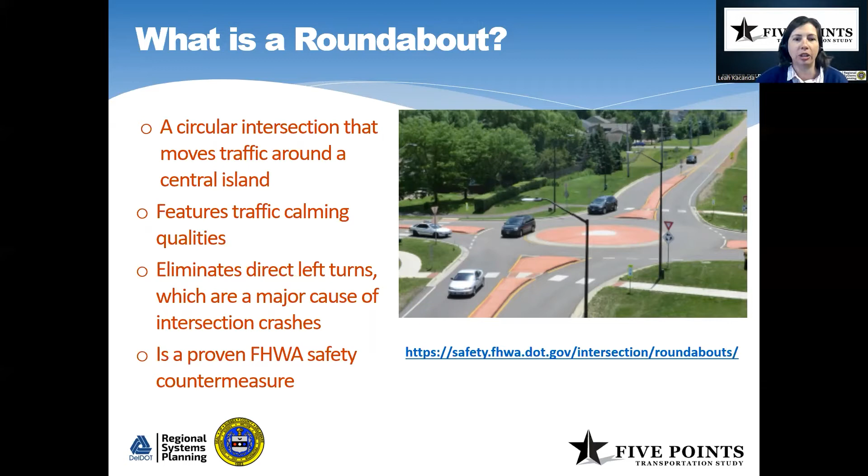In your meeting packets, you should be able to directly click on that link and any other links you see in the presentation to learn more. Just keep that in mind.

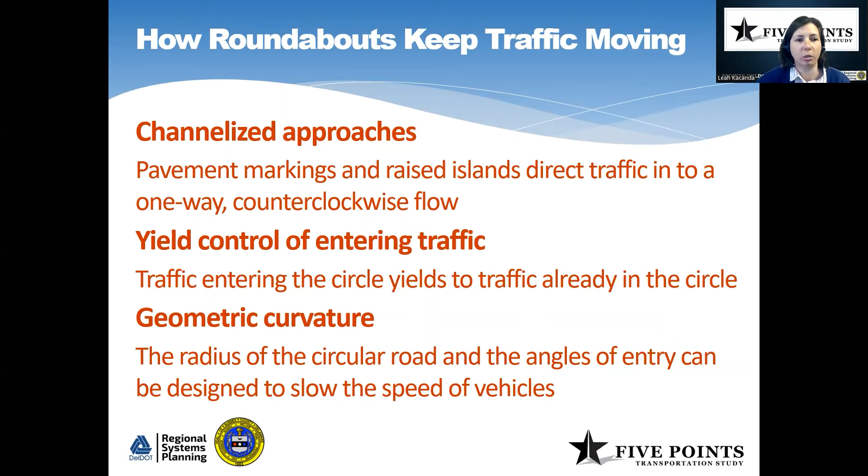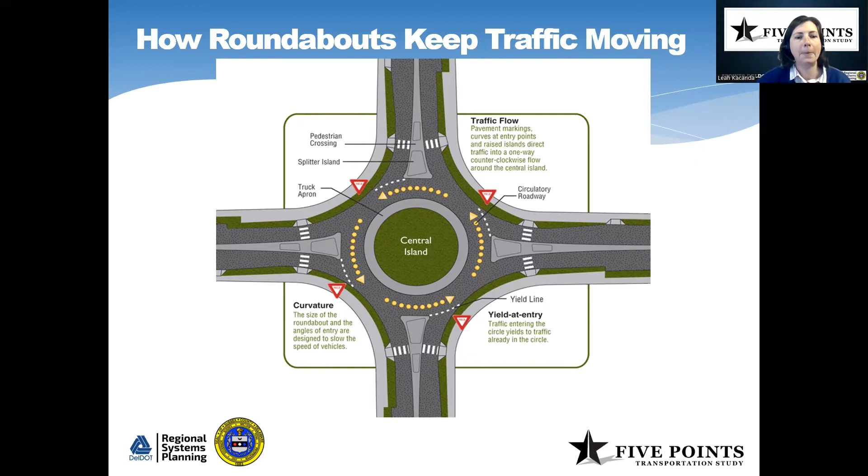So what is the difference between a modern roundabout and an older traffic circle? They're actually pretty significantly different. An older style traffic circle is much larger. If you think about downtown Georgetown, that's an older traffic rotary. It's a very big space.

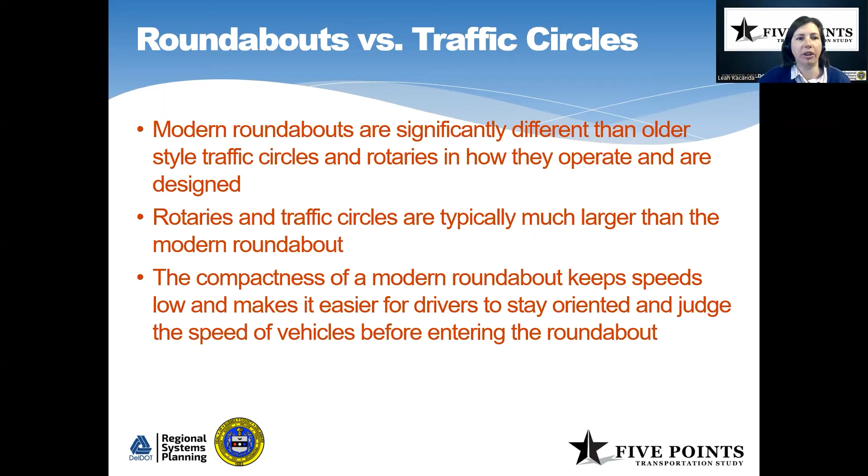And that doesn't have some of the same benefits we've just been talking about. It doesn't keep speeds as low because it's much bigger, and it's also harder for cars to see people entering and leaving and keep track of things. So the new modern roundabout is substantially better, and some of those differences are shown here on screen.

Leah, Kim has a question. Kim? Yes, actually, I probably raised my hand too soon. You might be about to answer that question.

I was just curious why there weren't more merge lanes on the circles, so that if somebody's pulling off, you have time to pull in. But you were just saying you don't want people weaving in the circle.

Does anyone else from the project team want to speak to that a little bit more eloquently than I just did? I was just curious about one.

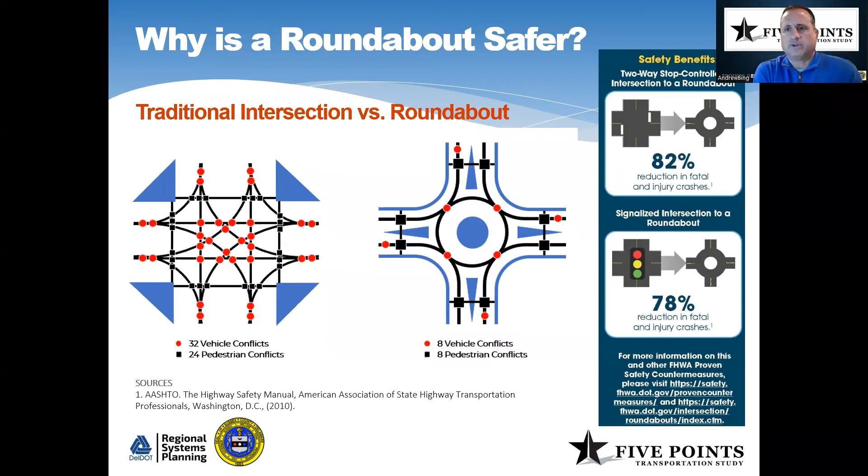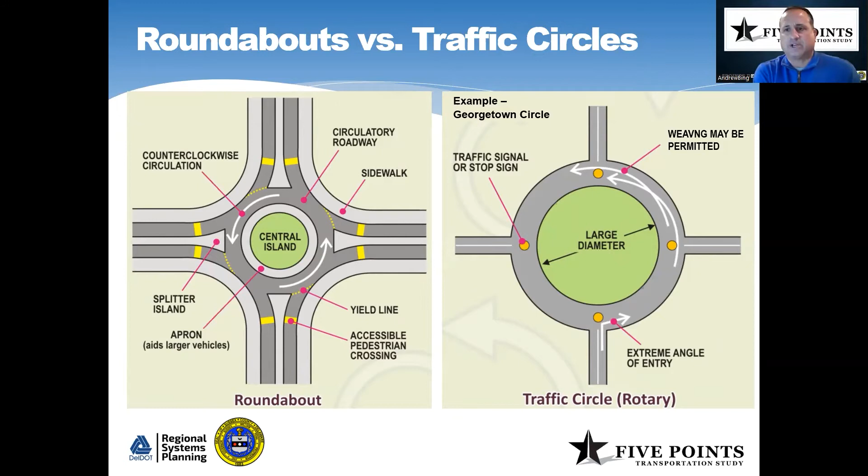I appreciate the positive responses to the first few slides. Why don't we hold off on questions again, unless there's a point that someone doesn't understand, and then let's come back at the end of Leah's presentation and have a discussion where everyone can chime in. Go ahead, Leah. Thank you, Andrew.

In further support of folks who get confused or otherwise when using a roundabout, DelDOT does have some very great and useful guidance on the website right now for how to use a roundabout for all modes. So we'll start with cars, which is pretty straightforward, and it seems like most of you are pretty familiar with this.

But again, for those of your neighbors who may not be as comfortable: slow down when you're approaching the roundabout, stay to the right, keep an eye out for people walking and biking, make sure you yield if there's already traffic moving around the circle. Once you're in the roundabout, don't stop unless you're avoiding a collision. Continue traveling in that counterclockwise direction. Do not pass—there shouldn't be room in the roundabout to pass, so that shouldn't be too big of an issue. Just continue following the roundabout until you exit.

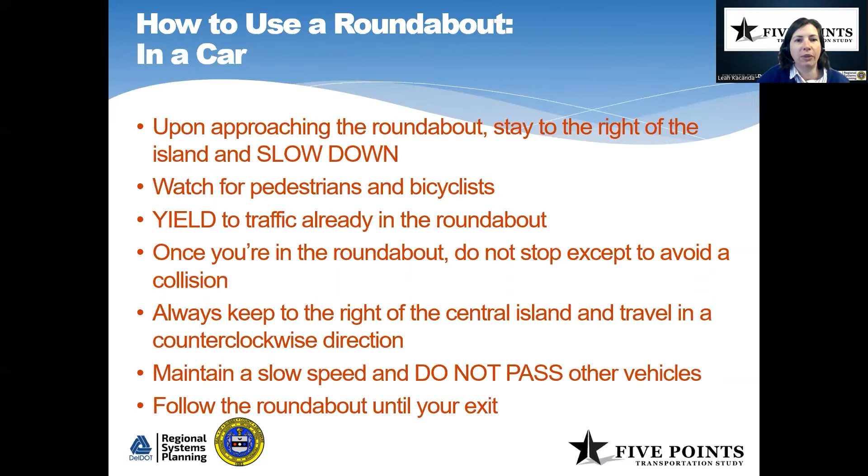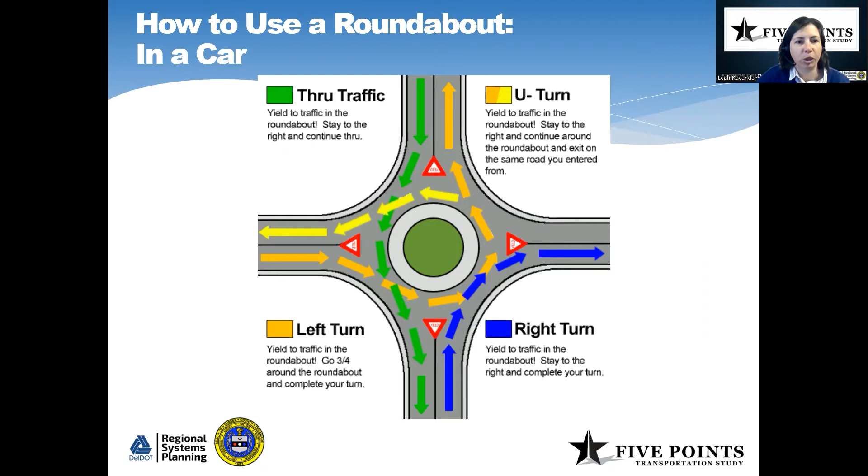I think one thing we can all agree on is that some of us learn better looking at these diagrams, and some of us like the written-out version. So we'll make an effort to include both forms in future communications, both with the public and others.

We want to reiterate: part of the reason roundabouts are better for cars is also a reason they're good for people walking and biking, because that slower speed means non-motorized users are much safer since cars are more likely to yield. They don't have to stop as quickly or as severely because they're already traveling slower. When they do have to stop, their stopping distance is shorter and the risk of collision is lower. And if there is a collision, there's much less chance it will be severe because speeds are lower.

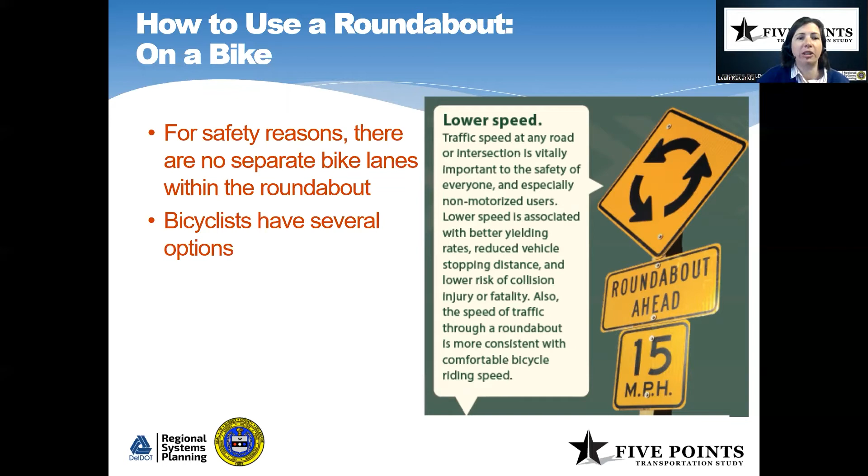So a bike has three options. As you see in the upper right, they can ride like a car with traffic—an option, as I'm sure Mike Tyler knows, for the more serious, avid cyclist who's comfortable riding and sharing the lane. They can join the lane and travel around, and because speeds are pretty slow, that's comfortable. Now, if cyclists are a little less comfortable, they can dismount their bike and travel through the roundabout like a pedestrian, using sidewalks and crosswalks.

Alternately, especially in the beach area, there may be a shared use path available, and in that instance the bike would behave much the same as a pedestrian because that pathway would also use crosswalks. On this slide we have a diagram showing those different behaviors—in the lower right, in red, you can see that bike behavior.

So one bike there is kind of joining the road with traffic and the other one is using the sidewalk to move through. And then for pedestrians, you see in that blue figure in the blue line, just using a crosswalk, sidewalk to crosswalk again to travel through that intersection. One thing to remember, if you're walking or biking, is never cross into the center island. You can imagine how it's pretty easy for someone to just get stuck in there without an easy or safe way out.

Also, for people using those crosswalks, it's important to look towards approaching traffic when entering the roundabout and then departing traffic when crossing the exit lanes. One benefit of roundabouts also is the splitter islands that help divert motor vehicles also can provide a pedestrian refuge. So that's a little bit of extra space to catch your breath and look the other direction when crossing.

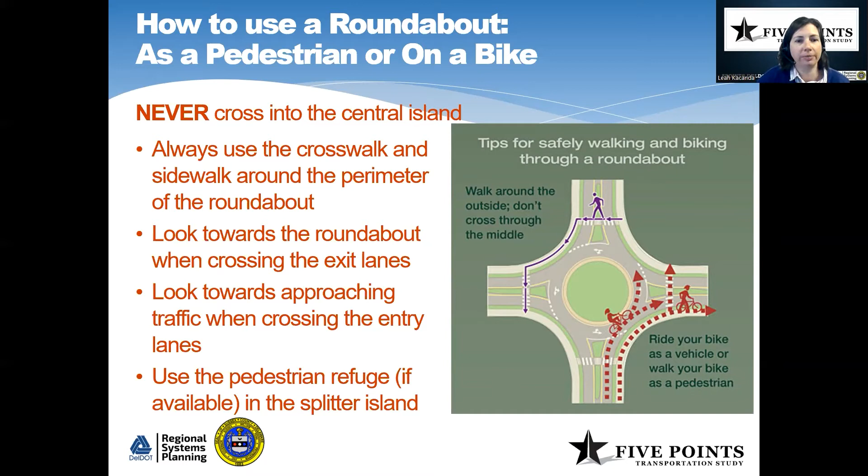Pedestrians, as always, whether they're crossing near a roundabout or just at a normal mid-block crossing or other signalized intersection, should only cross when it's safe. Make sure that drivers can see you when you're crossing or wait for that adequate gap in traffic. And on the bottom there, you can see, and this kind of speaks to what was raised earlier, when there is a multi-lane roundabout, that is a little bit trickier for pedestrians. People crossing have to make sure that both lanes of traffic are clear before they make that crossing movement.

So, as Andrew alluded to earlier, and I'm sure many of you know, given all of your— I'm sorry to interrupt, but I will forget it if I don't ask. On those crosswalks, this is Bob. If somebody's in the crosswalk, obviously they'd have the right of way, but technically, as soon as a pedestrian's in the crosswalk, that means that traffic's going to have to stop. Does that still apply on these? Yeah, it's the same rule for crosswalks that apply to any crosswalk in the state. You know, pedestrian has the right of way. Okay, thank you.

Keep going, Leah. Okay, I saw you come on, Andrew. I was waiting for you to say something. Nope, I was just checking in with Bob. Right. Very good.

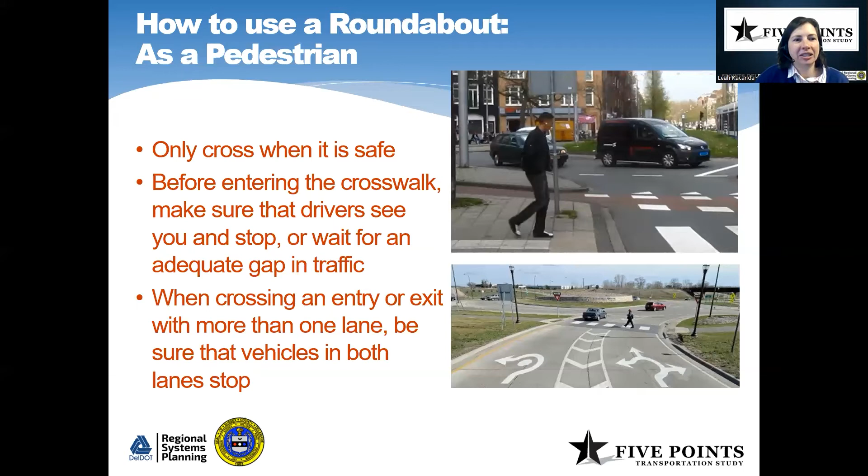So, more roundabouts are coming. So we know Beaver Dam Road came in October this past year, and I'm sure that has spawned a lot of the dialogue you've all been seeing on social media and maybe with your neighbors in person. But we also have a couple of other projects coming online soon that will have roundabouts, including Plantation Road, Wescoats Road at Marsh Road, and Minos Conaway has 3 roundabouts actually at the locations indicated on the screen. So more to come

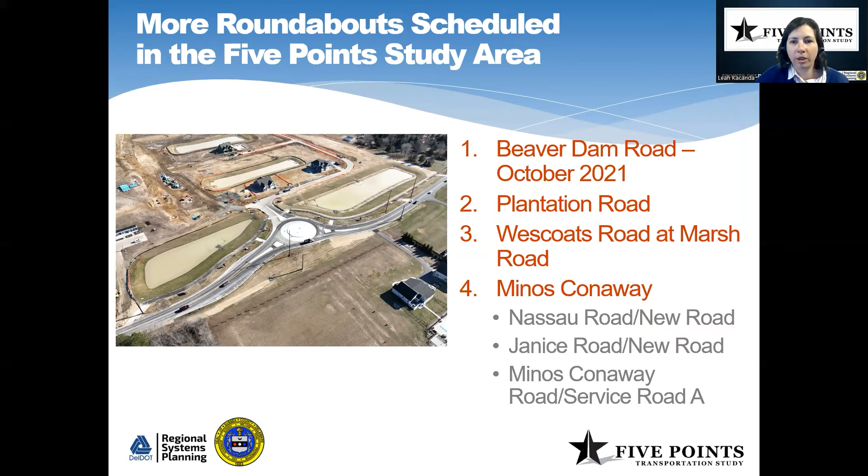with those. And for all the reasons we already discussed today, for the safety reasons, because of the improved traffic flow, roundabouts are the preferred intersection improvement considered across the country, not just in Delaware. And it's because they are safer. They're safer than traffic signals and stop signs. And in addition to that safety benefit, they also improve that traffic flow and are better for the environment.

That being said, as Todd said earlier, they are considered on a case-by-case basis. So this isn't just intersections changing, we're putting a roundabout there. It does depend on that analysis of current traffic volumes and flows, as well as how much right-of-way is available, the environmental impact, and drainage and utility impacts.

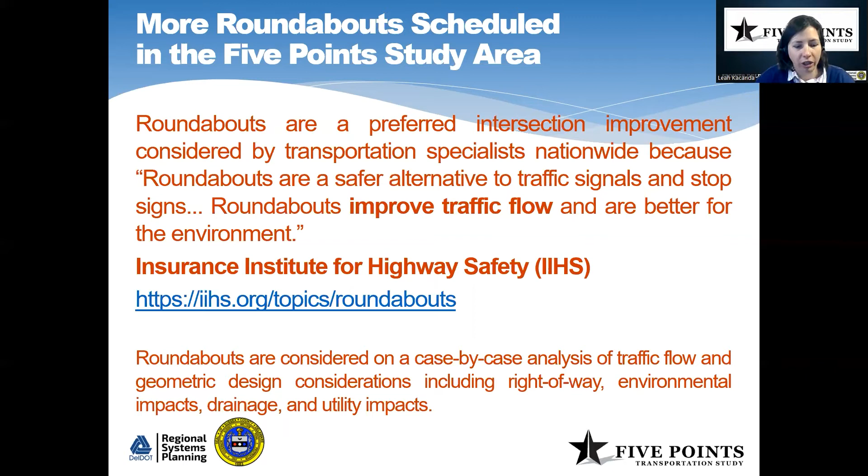More information on roundabouts is available on the DelDOT website. As Bob, I think you mentioned earlier, you were directing some of your neighbors to that site, there's a roundabout location map that's interactive, as well as more information about how to use roundabouts for different modes of travel. Thank you. Andrew?

Great, Leah, thank you. That was great. And we'll now open it up to working group questions and comments. Again, just raise your hand. Hopefully, Mike Tyler, we've got your audio now. But before we do that, I was going to have Shantae come on just to respond to a point we got through the Q&A. Just seemed like a worthwhile time for her to come on and say a quick hi and respond to that question.

So, hi, everyone. Shantae Hastings, Deputy Secretary for DelDOT. So the question that we received in the Q&A is, why is the new roundabout at New Road and Janice Road have a posted speed limit of 15 miles per hour? It is not needed. And also the private roundabout in Village of 5 Points has stop signs up. That defeats the purpose.

So in terms of the 15 miles per hour at the new roundabout, the 15 miles per hour is likely an advisory speed limit. So those are the yellow placards with black text. So that's not regulatory, like a speed limit sign. That's a white placard with black text. So it's just an advisory speed.

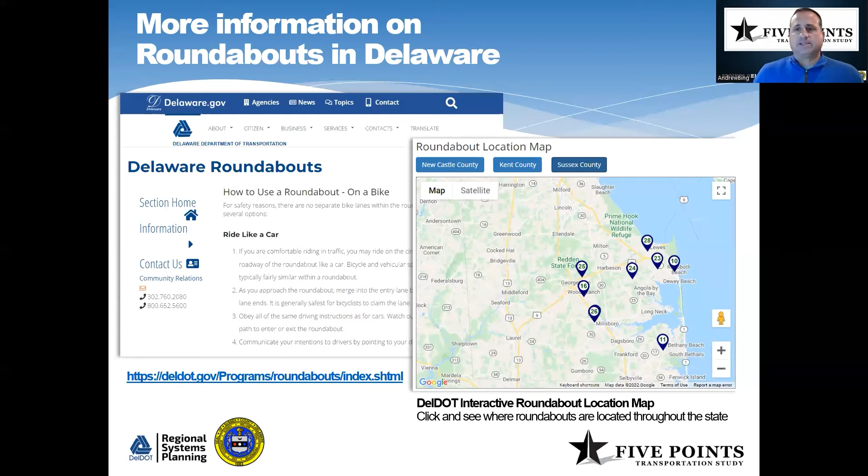Okay, we're going to move on. I don't see any other hands raised, but again, one of the roles that this working group plays is to not only attend meetings, not only engage in discussion and ask questions, but to share this information, to make people aware of it. You certainly don't have to provide the presentation, but it's the kind of thing that if you're out there talking to someone, you can point them to this presentation on the website, let people know about it.

Speaker Schwarzkopf, in terms of your point of publicizing it, some of the images are certainly something that we can discuss and look into. So what we're going to do now is shift to our next discussion, which is trees within the right-of-way. I'm looking off on my other screen here while I read something, but this is a slightly different presentation in that it is in response to one of our recommendations from phase one, recommendation B14, which was a recommendation to identify locations where trees can safely be planted within the right-of-way.

So this was a recommendation that was, I guess I misspoke, this was initiated in 2021. DelDOT's going to need working group input to move this recommendation forward. So it doesn't all have to come tonight, but we are looking for that input.

Mike Campbell is going to provide this presentation tonight and going to provide background to the working group on guidelines that need to apply to trees in the right-of-way. So that's kind of the purpose of this presentation, is both to inform, educate, but also engage in a discussion with the working group and get some feedback and input. So I'm going to bring Mike Campbell on, who's going to lead us through that presentation.

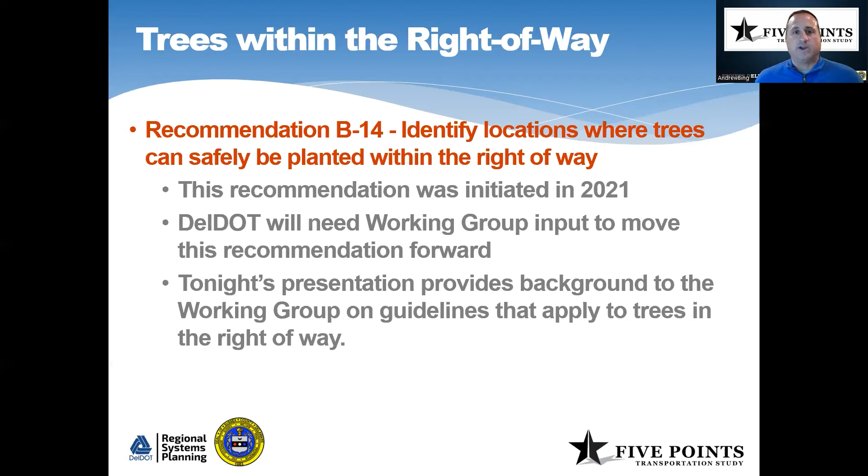Thank you, Andrew. Good evening, everyone. Tonight, I'm happy to provide a brief overview of the process and framework of when trees and landscape is provided within the public right-of-way. First, I'll walk you through when landscaping is placed within the right-of-way. Then we'll talk a little bit about where landscaping is usually permitted within the right-of-way, the types of landscape that are permitted, and lastly, who's responsible for maintenance.

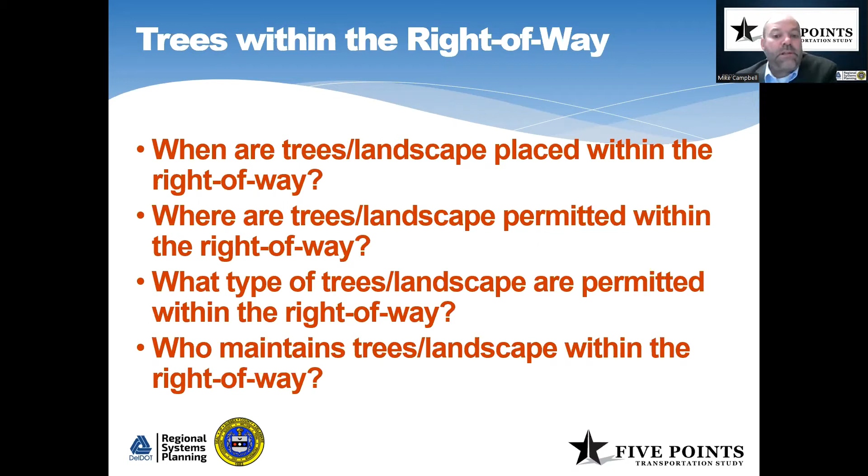So there are two main reasons DelDOT would include plantings on a typical project within the public right-of-way. The first is when it's required by law. The Landscaping and Reforestation Act requires that DelDOT provide reforestation for impacts to existing forests. The quantity and placement of reforestation is usually dictated by the threshold of impacts. The second reason DelDOT may consider including landscaping is when the community requests it. They may request landscaping for aesthetic purposes, or possibly for visual screening, or to reduce noise pollution from an adjacent roadway.

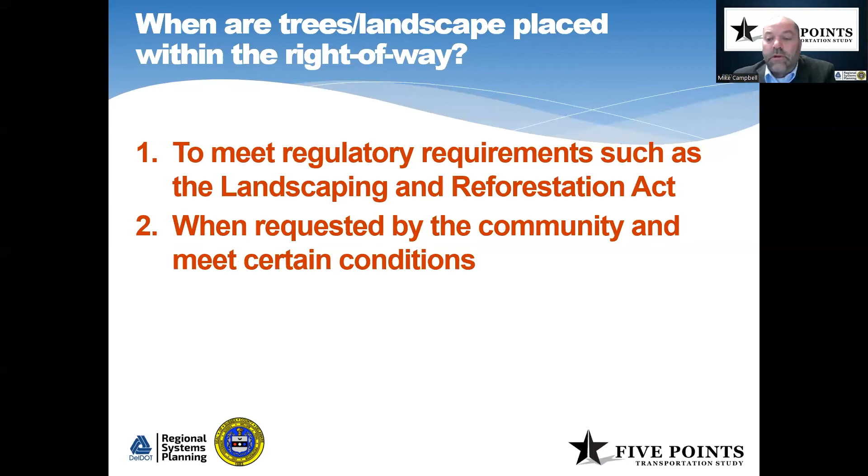The requirements or desire for landscaping starts early in the planning process. As a project goes through the planning process, we consider mitigation of forest impacts, and the desire for plantings may be brought about during the public engagement process, similar to what we are doing here with the 5 Points planning process. Internally, DelDOT planning will coordinate with the local DelDOT maintenance district and concurrently with DelDOT's roadside environmental coordinator to discuss the project and any potential maintenance concerns related to the landscape.

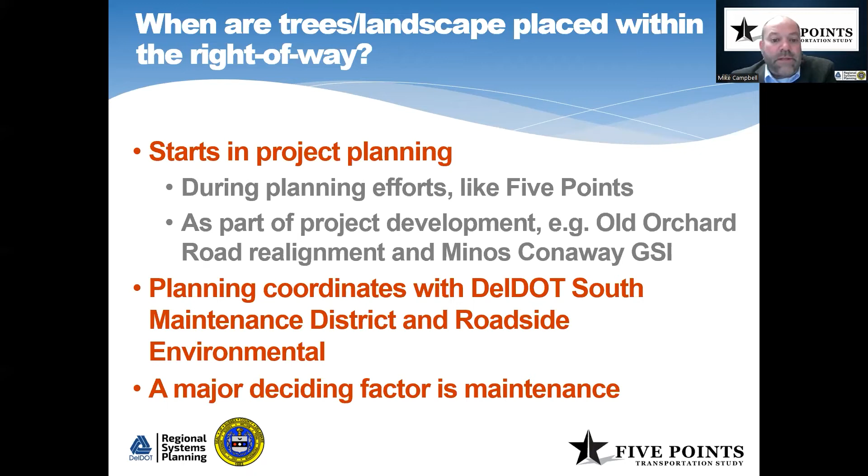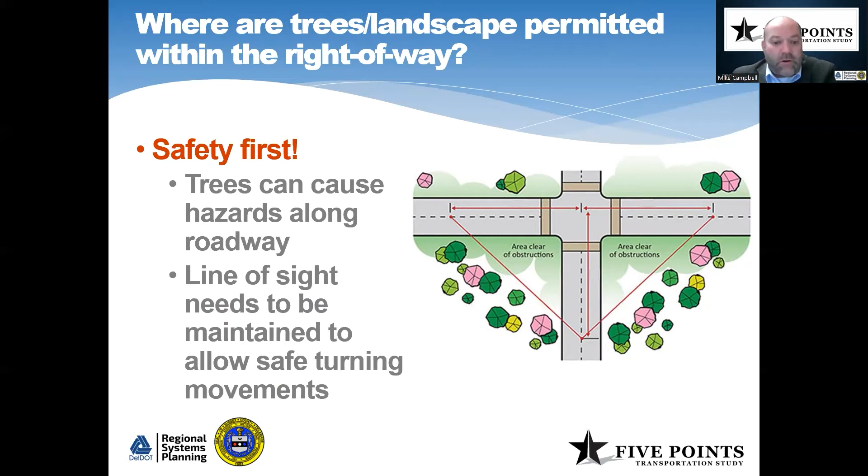So now that you've planned for landscape in the right-of-way, we'll talk a little bit about where landscaping can be placed. Safety is a major factor. Trees are obviously fixed objects and must be carefully placed to not cause a potential hazard. Trees must be set back at intersections to maintain lines of sight to allow for safe movement for pedestrians, cars, and bicyclists. Lateral offsets are also critical components to the design. The roadway classification, design speeds, and presence of a physical barrier will dictate required offsets for safety. Adjacent land use is also a factor, whereas street trees or aesthetic stormwater plantings behind the curb may be more appropriate in an urban setting or more desired by the public as well.

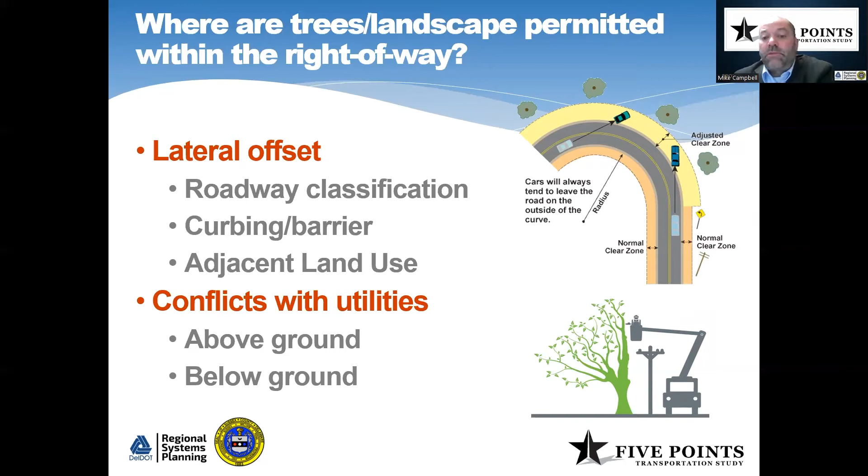Trees and utilities are often competing for limited available space within the right-of-way, both above ground and below ground. We want to make sure that we use the right species that are selected for the project, and that'll reduce future maintenance impacts for both the trees as well as the utility companies. As I mentioned, proper species selection is also critical for the success of the landscape. Things like tolerance to salt spray and wind and sandy soil are some of the environmental aspects to consider, especially specific to Sussex County. Obviously, the department does not want to promote any harmful species, such as an invasive species. And there's currently a draft bill that may require all plantings within the public way to be native species. So we'll provide an update on that as that bill gets developed further.

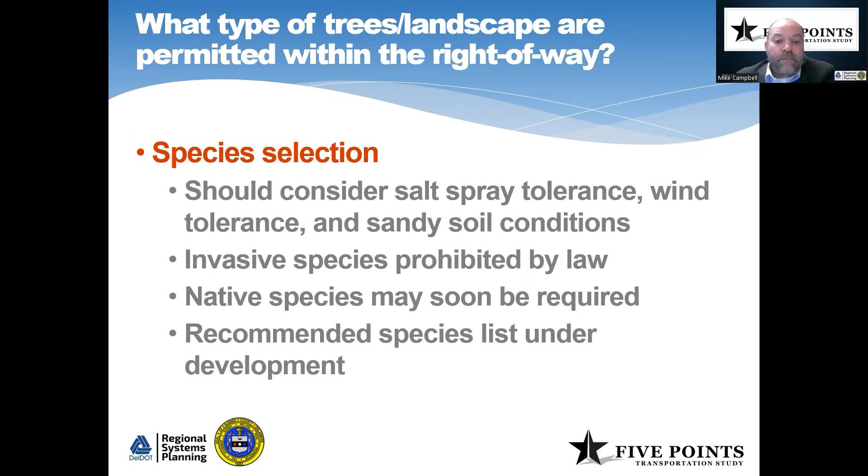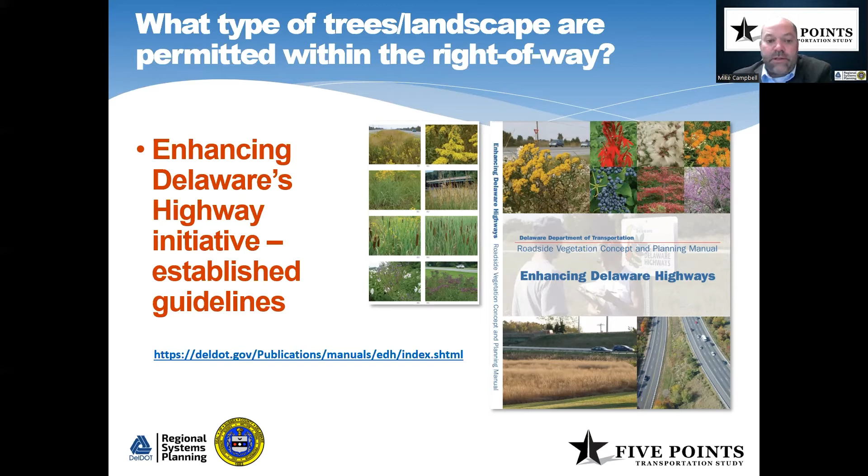So lastly, I'd like to stress the importance of maintenance on behalf of the department, which has a very limited budget when it comes to maintaining elements within the public right-of-way beyond the pavement itself. A major consideration often overlooked when we talk about maintaining landscape in the right-of-way is the maintenance of traffic requirements to provide a safe place for volunteers or organizations to maintain landscape adjacent to oncoming traffic. DelDOT does have the ability to maintain natural landscape, such as native grasses and flowers and wildflower meadows and forest edge plantings.

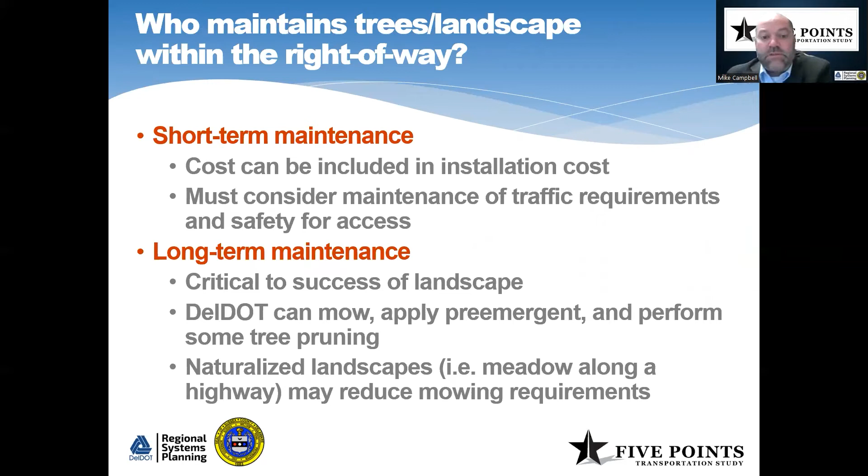So I'd like to end with a final word about maintenance. There's no such thing as a no maintenance or low maintenance landscape. Having a signed maintenance agreement with a designated entity in place that can commit to long-term funding will go a long way in getting landscape placed within a public right of way on your projects.

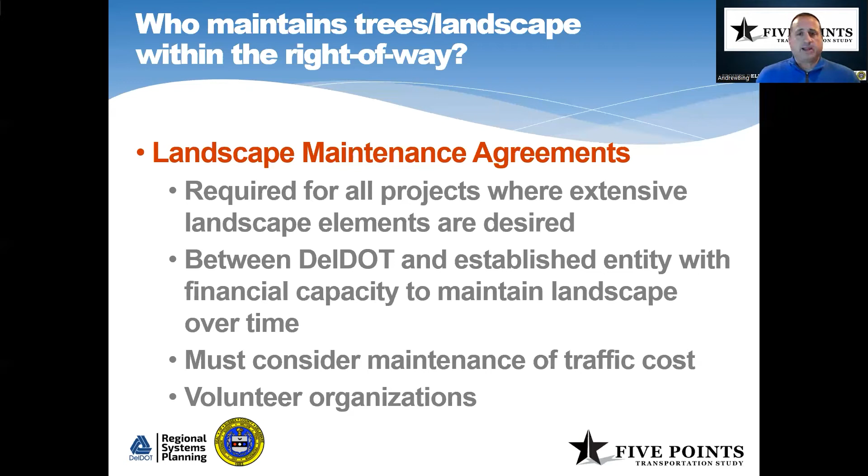So we're going to move on to our phase 2 implementation plan update. I'm going to bring Leah back on to go through that. This is a monumental point - no one has ever attempted to do this other than Jeff Riegner, and now Leah is coming on to do it, and we're looking forward to that. It'll become obvious, but this group, DelDOT, the county, Sussex County, everyone has played a huge part in all the progress that's been made - a lot of accomplishments in terms of all the recommendations and projects. So Leah's going to go through that. Again, if you're a member of the public and wish to make a comment, put that into the Q&A. And we'll come back at the end for any questions anyone has. Go ahead, Leah.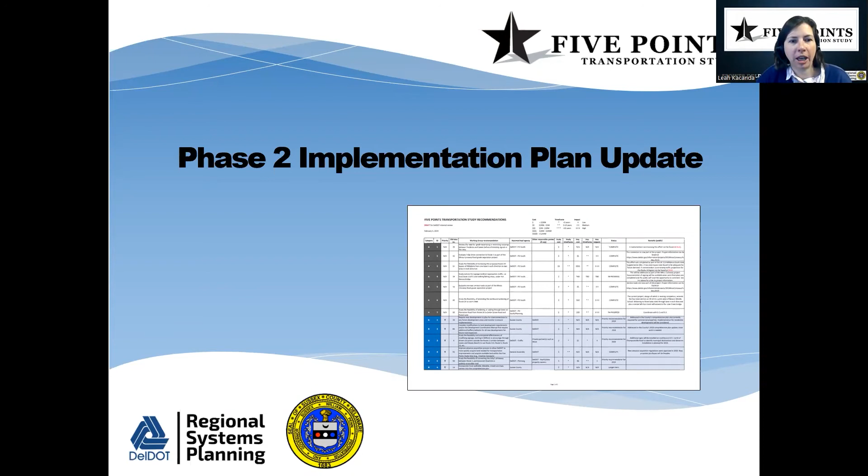Thank you, Andrew. So in your meeting packets, you have all of the implementation plan updates in the spreadsheet form, which you see on screen there. But for the purposes of our presentation today, we're going to walk through them slide by slide for each of the recommendations with an update from last year. As you all recall, we had 78 recommendations coming out of phase 1, and we categorized those into 5 different categories. Each is color coded as indicated on the screen, which matches the color coding in that spreadsheet and will also match the slides you see today.

Category A in gray is really recommendations to be implemented under current projects or initiatives, and most of those are already underway. Blue are policies and procedures to make the area more efficient, sustainable, and beautiful. Green is really capitalizing and making the most out of existing roadway infrastructure. Red is focused on other modes than driving, so how to make walking, biking, and transit more viable as alternatives. And lastly, things in category E, yellow, are new infrastructure projects - those are the long-term recommendations, but we do have some updates in that category as well.

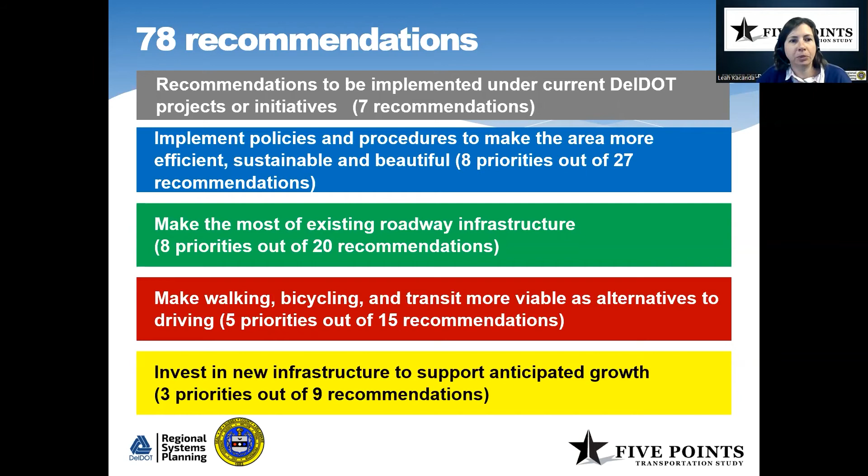So of our 78 recommendations, 55 are in progress, ongoing, or completed. That is one more than what we discussed at our last meeting in October. We have one item in category B that is newly in progress - we'll talk about that in a moment. And 3 recommendations that we've actually completed since our last meeting. One has changed from in progress to ongoing, which basically means instead of actively underway, it's in a slight holding pattern. We'll talk about that momentarily.

Good news, reflecting on our accomplishments of the last year: all 7 recommendations that we discussed at our last January meeting to be initiated in 2021 were initiated. So that's great. And we have 4 new recommendations that we will be initiating this year. So as most of our working group members know, this is our opportunity to really set that work plan for the new year and provide that update.

And here you can kind of see the change from the beginning of last year to the end. And again, we have some new projects we're bringing on board in categories B, C, and D, for 8 total recommendations beyond what we were looking at last year. So we did have a very productive year during 2021.

So jumping into category A, A7: looking at the feasibility of widening or adding through lanes on Plantation Road between Route 24 and Cedar Grove Road and Postal Lane. This effort is on hold pending the results of the Mulberry Knoll Road Extension Study, which is expected to be completed this spring. We hope to come back to you with more on that later this spring once we know the outcome.

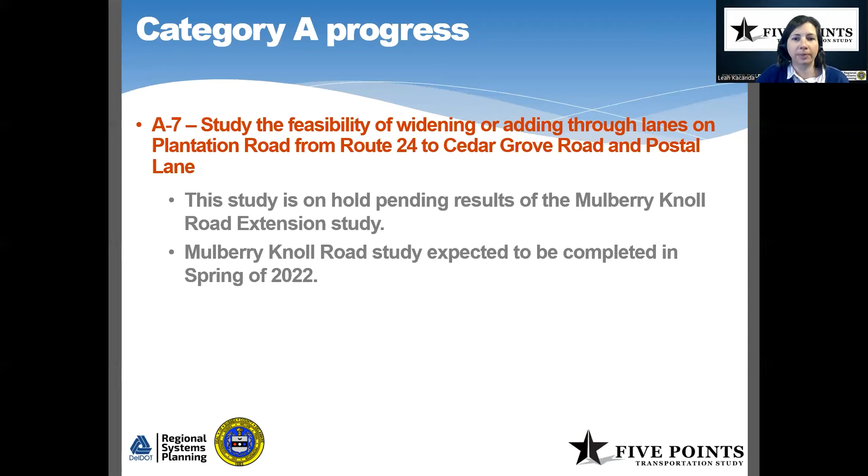And that is it for A. The rest of the A recommendations, the other six, are all in progress with no substantive updates, as you'll see in your spreadsheet. So moving on to category B and recommendation B2.

Recommendation B2: considering modifications to the land development requirements and/or DelDOT's development coordination manual to require additional buffers or setbacks for all new developments for future road expansion. In 2020, the Sussex County Planning and Zoning Commission did discuss a potential future revision to the zoning code, which would clarify how much parking may be permitted in the front yard setback. Obviously, when you have parking in front of new development, that precludes future road widening. So that conversation has been introduced at the county level.

Other changes relevant to this recommendation: we heard last January that the development coordination manual was updated at the end of 2019 to require a larger width along two-lane principal arterials. Keep in mind though that of all our east-west routes in Sussex County, only Route 404 is a principal arterial. So that change to the DCM would really only apply in a pretty limited circumstance, since the rest of the east-west roads are minor arterials or collectors. Changing the right-of-way requirements for other road classifications that are not principal arterials would require another update to the DCM.

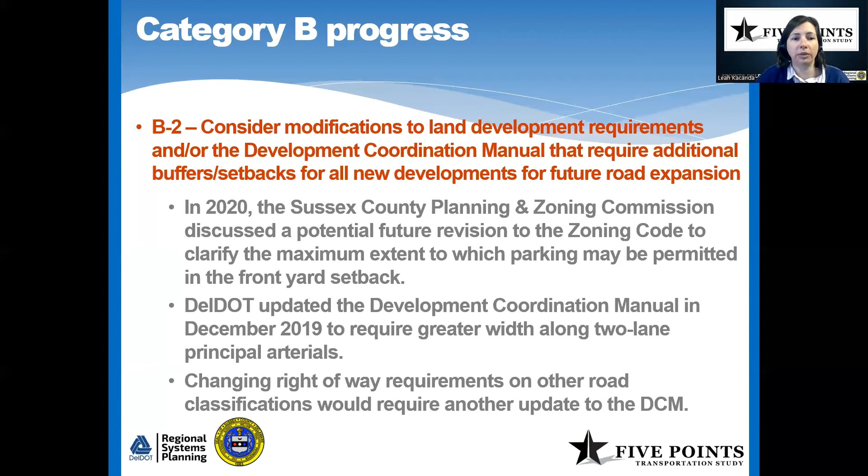Regarding those updates, DelDOT is currently updating Chapter 2 of the DCM, which relates to traffic studies, while Chapter 3, which deals with right-of-way, is not yet underway. So that is coming; DelDOT will be looking at Chapter 3, but they're not there just yet. Also, the Strategic Highway Safety Plan recommends revisions to the DCM to require additional pedestrian infrastructure improvements related to new development. We thought that would also be of interest to the group. So DelDOT is actively working on more changes to the development coordination manual.

Anyone from the county want to make any comments on this point before we move on? All right.

This is Mike Tyler, I just have a question. You mentioned pedestrian, but what about cycling for the developments? I noticed in some developments they do have bike lanes and things like that. Are we going to be asking them to do that as well?

Leah, do you know, or Pam? Pam, oh hi, okay, I didn't see you, Pam. Sorry, go ahead.

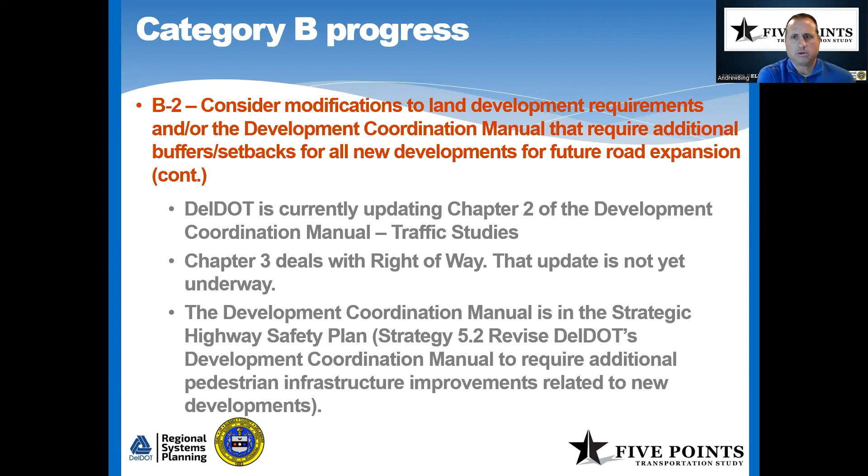Moving on to recommendation B5: study the feasibility of converting the Arby's driveway between Route 1 and Savannah Road into a publicly accessible road. We had some interesting updates on this one this year. DelDOT did negotiate a concept for connections through the Nicola Pizza property, and Sussex County approved that site plan with the easement language. However, progress on this is on hold until Arby's comes up for redevelopment. In the meantime, traffic conditions will be monitored during the Old Orchard Road realignment construction. So we'll keep an eye on things, but that is on hold until Arby's comes through.

Keep going, Leah. Let's finish category B and then we'll come back to Bob.

Sounds good. Recommendation B8: looking at the feasibility of a parking management system to alert travelers when parking lots at major destinations are full. You may recall we discussed this last year. This largely is in consideration of folks traveling down south to go to Cape Henlopen and the beach, who get all the way there and realize the parking lot's full. So DNREC is getting ready to update their entrance to the state park and are very interested in exploring adding automated counters for tracking parking occupancy. They are in coordination with DelDOT on that, so hopefully more to come on that this year.

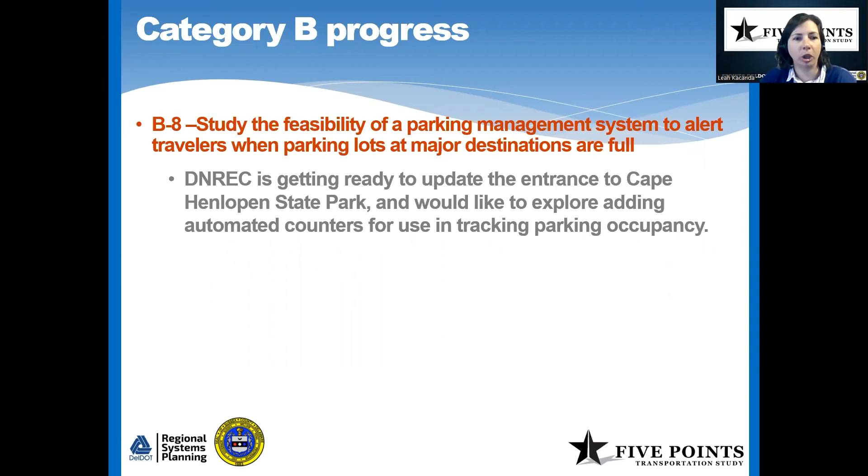Recommendation B10, endorse don't block the box legislation with camera enforcement. This is one of the items that will be initiated this year. Currently, local legislators and DelDOT are drafting that legislation. So more on that to come as well.

Recommendation B14, we obviously heard a lot about this from Mike a little bit earlier. At the April meeting, we hope to hear a little bit more from you about desired locations for tree plantings. Mary provided us a bit of an update on where the Byway Committee has been working in this space, so more conversation on that in April. That'll be everyone's homework assignment.

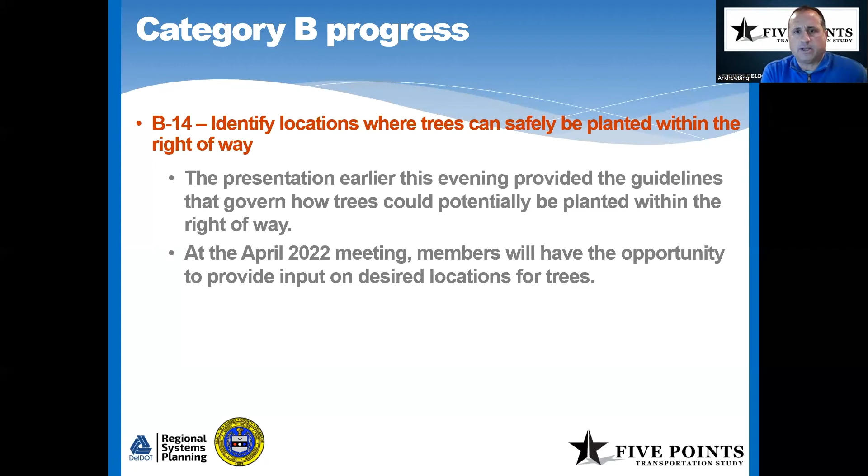That completes the update on category B. Bob, did you have something you want to make a point about? And if anyone else wanted to come on and talk about any of those updates to category B.

I have a question about B5, the Arby's Road item. It's on hold until Arby's comes up for development. Is that an indefinite hold, or do they have a timeline, a requirement, or a schedule? I believe I was the original suggester for this one, although other people were interested in it, and I'd like to keep them apprised of the schedule. So whenever I see progress on hold indefinitely, I try to definitize when the hold is going to be released.

I'm happy to chime in on that from the DelDOT perspective. Bob, we're not planning to move this forward as a project really until Arby's decides to do some redevelopment. The reason is that making this connection requires an entire redesign of their current site. The parking on the right side, looking from Route 1 towards Savannah Road, has to go away if we make that connection, and their drive-through location really won't work. So it's a bigger effort, and we need them to come forward with a redevelopment proposal to make all of this work. We're not losing sight of it, but we're not going to push it forward until they have a development plan for their site.

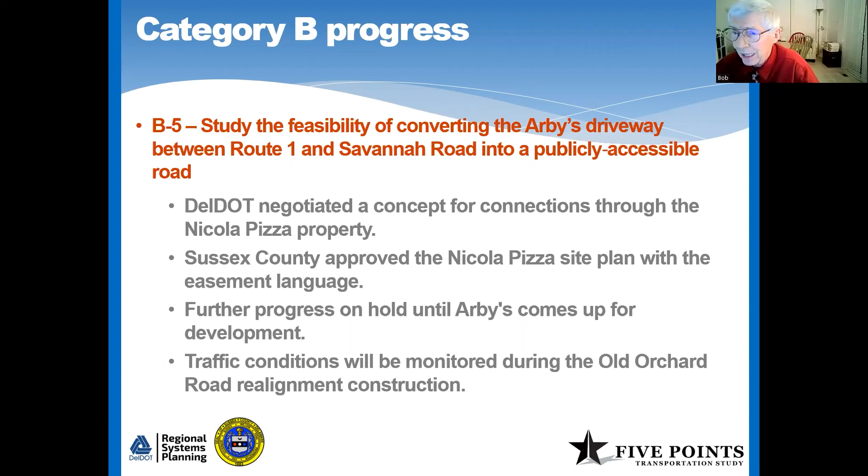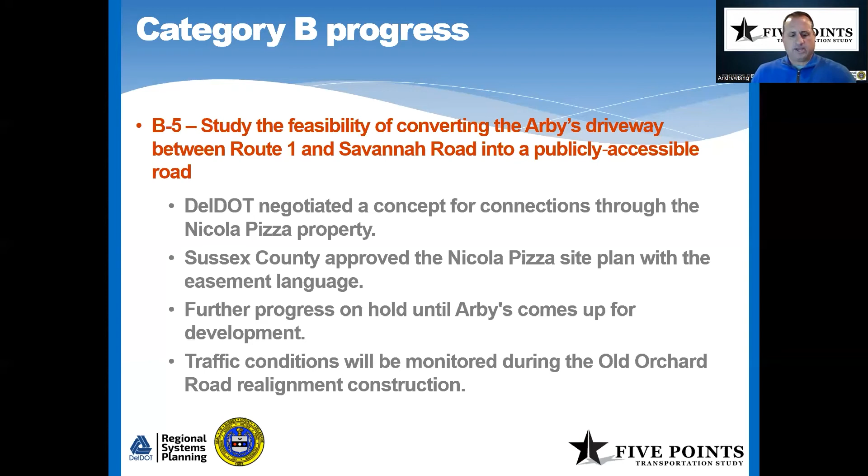I did want to make one quick point, not even a clarification, but just to be consistent. When we talk about something being 'in progress,' items will be complete at some point. When we refer to it as 'ongoing,' an ongoing item is part of a normal procedure on a continuing basis, so it's something that can never really be finished. It's always being worked on, monitored, and so forth. So we had referenced that in the beginning.

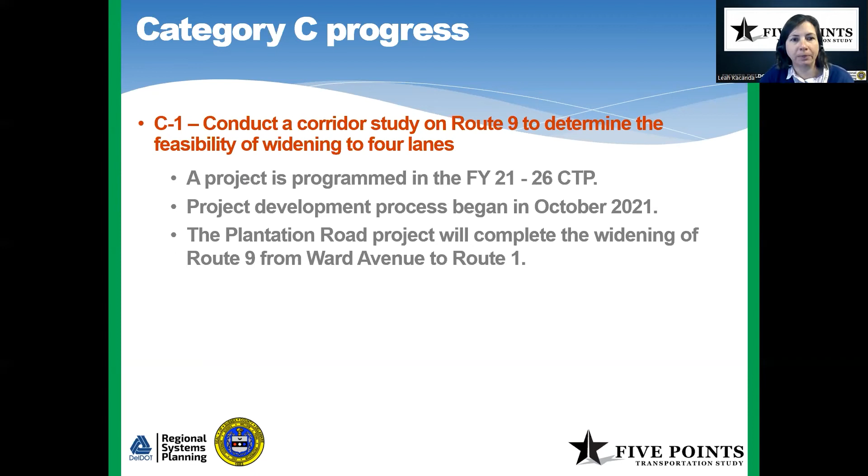C2, also relating to Route 9. This is for a study at Route 9 and Minos Conaway to determine if a traffic signal is warranted, and if so, install a signal. That study is complete and a traffic signal was not warranted. However, the study did result in the recommendation of a southbound right turn lane, keeping a stop sign there. The project was programmed into the FY21-26 CTP, but that right turn lane was accelerated thanks to the maintenance division by adding it to a paving and rehabilitation project. Construction on that is underway.

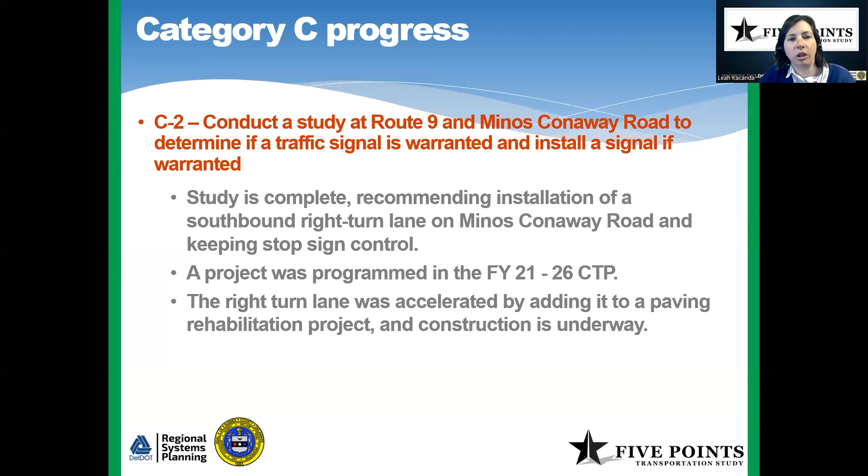Recommendation C4, improving the Canary Creek Bridge on New Road to reduce flooding. That project is also underway under DelDOT's Bridges State of Good Repair budget. Online public information meetings were held in June and August this past summer, and final right-of-way approval has been received. We anticipate that construction will begin fall of 2023, as opposed to after the completion of Old Orchard Road as originally planned.

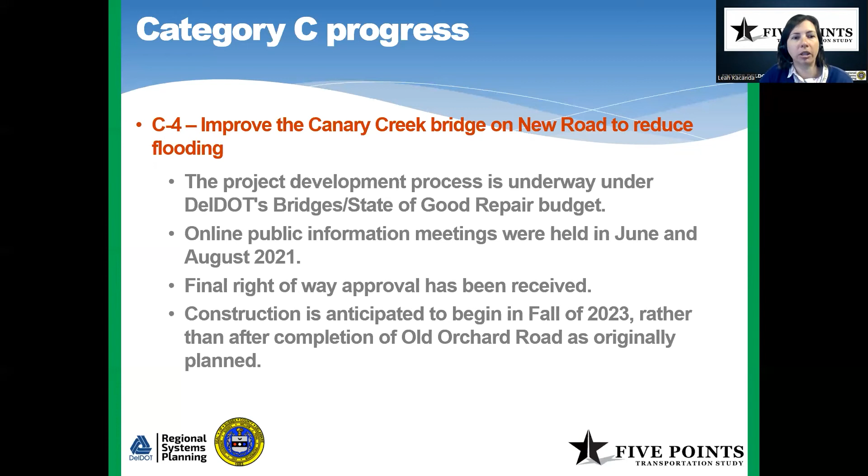C5, improve the intersection of Cave Neck Road, Sweet Briar Road, and Hudson Road. That project is also programmed in the FY21 CTP. DelDOT presented alternatives to council this past November. A public workshop was also held on November 16th, and a preferred alternative is scheduled to be selected early this year. Based on that preferred alternative, design should be complete by early 2024.

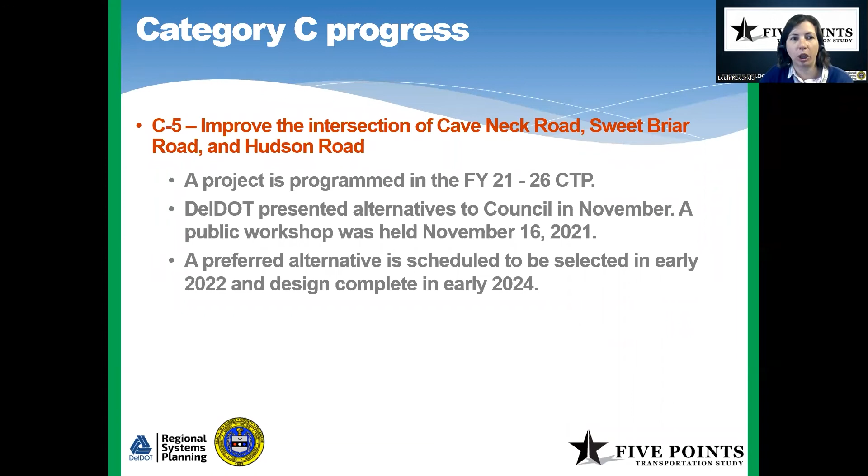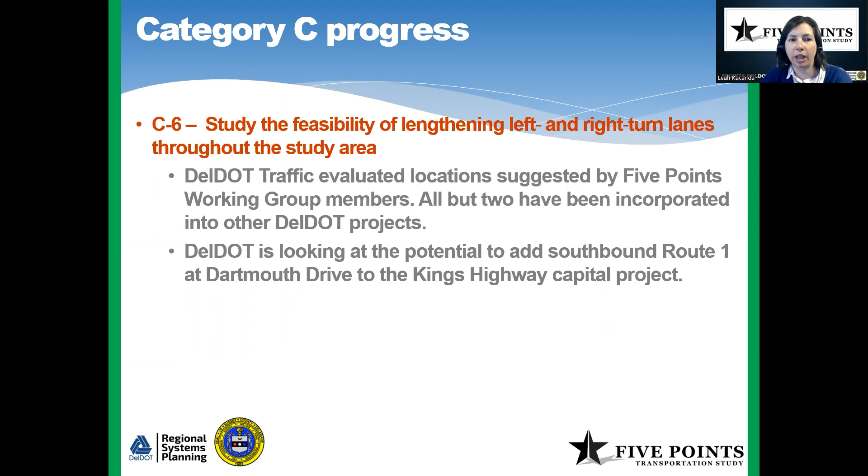Recommendation C6 — this one's a little bit broader, looking at the feasibility of lengthening left and right turn lanes throughout the study area. DelDOT Traffic already ran with this one, evaluating locations suggested by you all, and all but 2 of those recommendations have been incorporated into other projects. Currently, DelDOT is looking at the potential to add a southbound left turn lane off of Route 1 at Dartmouth Drive to the Kings Highway Capital Project.

So more to come on the outcome of that. Other locations include southbound Route 1 at Ames Drive, which will be reevaluated after the Holland Glade Road project is complete, once we understand better how traffic's moving through the area at that time. Design is currently underway on southbound Route 1 at Old Landing Road. Lastly, the pavement rehabilitation project under construction at Minos Conaway is also adding the right turn lane at Route 9.

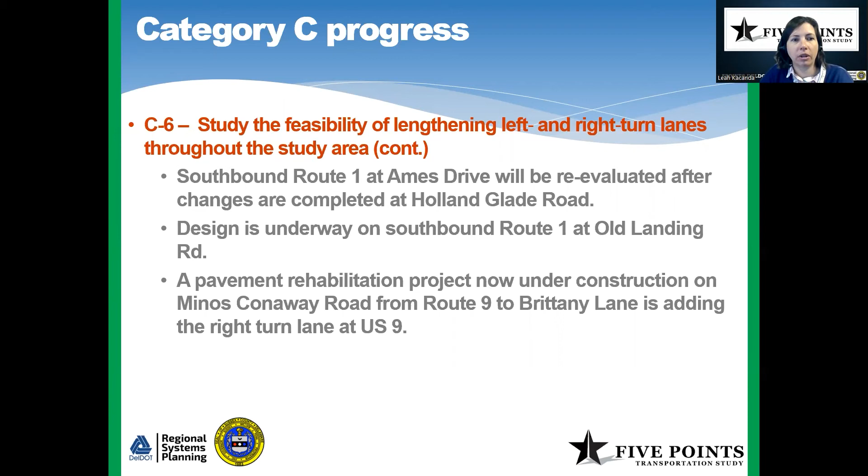Lots moving forward there. Also at Minos Conaway, looking at the feasibility of improving other road features, including lane widths, shoulder widths, turn lanes, which we just discussed, and curvature. DelDOT did complete a curve compliance study in February 2019, and those signage improvements were implemented in March of the same year. The Henlopen TID study — if y'all recall the presentation you received a year ago from Sarah — recommended a project to improve the roadway. That project is not currently funded. However, as previously discussed, the paving project is adding that right turn lane. Further action on this road is on hold, pending completion of the Minos Conaway grade separated interchange. We really want to wait and see how traffic behaves and how the new grade separated intersection works before we take a look at any further improvements there.

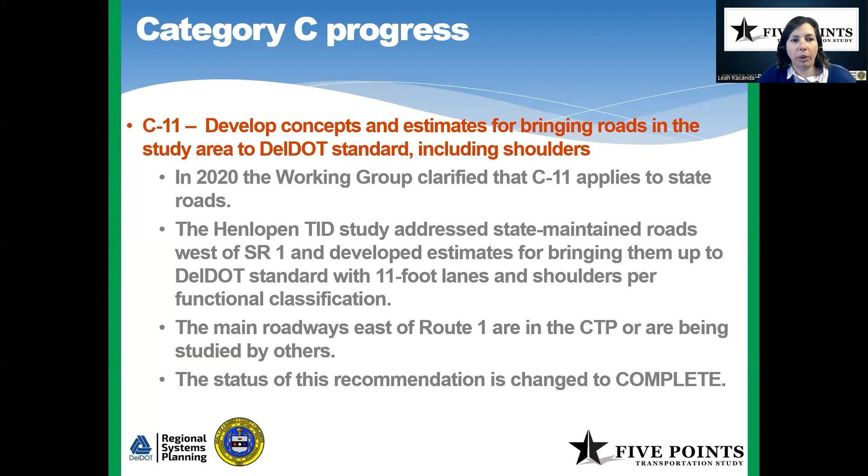C11, develop concepts and estimates for bringing roads in the study area to DelDOT standard, including shoulders. This is a little bit similar to what we just talked about on Minos Conaway, but this was clarified as only applying to state roads in the 5 Points area. The Henlopen TID study did address state maintained roads west of SR1 and looked at estimates for bringing them up to snuff with the DelDOT standard — 11-foot road lanes and shoulders. Roadways east of Route 1 are already in the CTP or being studied by other efforts. So we are considering the status of this recommendation complete. Again, this does not mean all those improvements have been made, but it does mean that pretty much all of the roads that would fall under this recommendation have concepts or estimates prepared, and they have entered into the DelDOT process. So one we can check off the list this year. Very exciting.

Recommendation C12, study access management opportunities along Route 1, including potential connections between businesses. Another piece of exciting news, an agreement between Lowe's and DelDOT has been executed that will provide access to Lowe's from Route 1 through the Lewes Transit Center property. So that's a big one that we've been fighting for a while now. Yeah, I see some, yes, bravo.

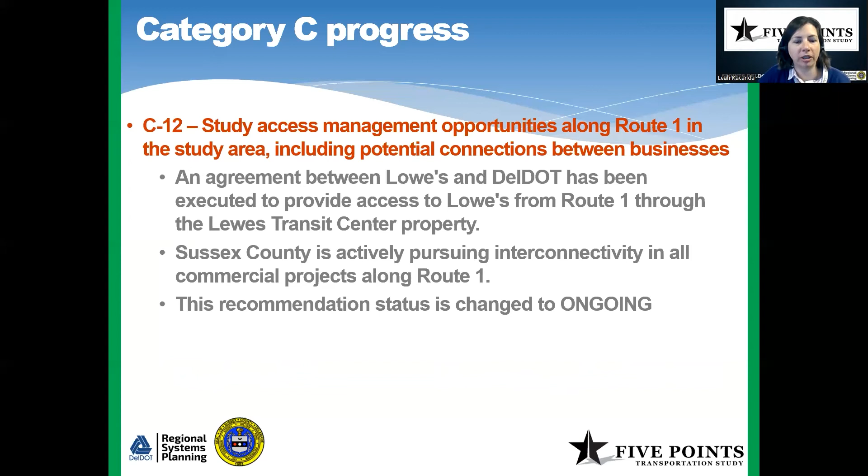Thank you, Speaker Schwartzkopf. Sussex County also is actively pursuing interconnectivity along all the commercial properties along Route 1. So, we talked about Arby's already. Lowe's is a great example of a win here. So again, as Andrew clarified earlier, this recommendation status is ongoing. So this isn't something we're ever going to be able to check off the boxes complete, because the county and DelDOT are always going to be looking for ways to better manage access along Route 1. So as more projects come online, I'm sure we will be providing more updates for this recommendation.

C14, feasibility of installing a Your Speed display on southbound Route 1 at Nassau Road. Here's another win. A radar speed sign was installed in August, about 415 feet south of Nassau Road. So we are considering this one complete.

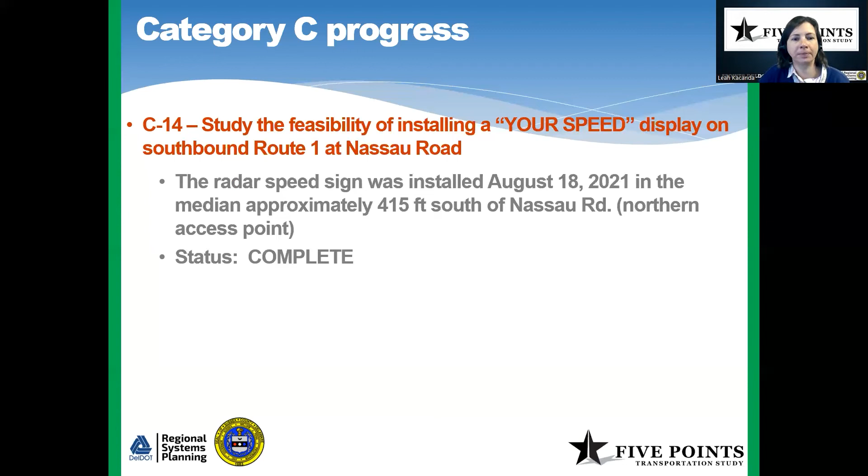And last one for category C, C16, look at the feasibility of providing driveway access from Beacon Middle School and Love Creek Elementary School onto Mulberry Knoll Road. So this is one we plan on initiating this year. DelDOT and the project team here will be revisiting the reasons behind the original school site access plans and why that connection was not provided at the time the schools were developed. And of course, we will be doing that in consultation with Cape Henlopen School District. So more to come on this initiative this coming year.

All right, great, Leah. Mike, thanks for your patience. Come on and ask your question.

Yeah, a couple questions. One is on the Minos Conaway Road. You're going to widen the Route 9 access, I guess, to Minos Conaway. That's a popular road that a lot of us cyclists use because it has a nice wide shoulder. I just want you to remain cognizant of that fact and allow for cyclists. One of the things that happens is they redo the rumble strips in the wrong place and they make them too wide. We want you to keep using those narrow rumble strips, but also you need to have some kind of a sign that says reduce speed or yield to cyclists in the lane, because we use that road. It's quite popular with a lot of cyclists in the area.

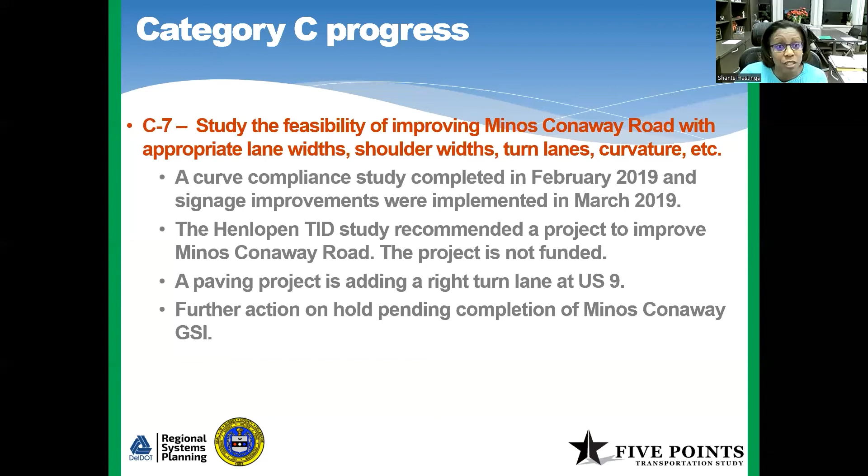Sure, I just wanted to talk a little bit about interconnectivity. Mike, great point. We definitely, I think, have missed opportunities along the way to do some interconnections, but I also wanted to share that there is a need for willingness on the commercial entities' side of things. So we don't just go in and say we're doing this interconnectivity. There really has to be their willingness to do it. And so we're trying where we can, especially with the new development proposals. And as you saw that Leah talked about, with Lowe's, we were able to kind of make something work for them. So we're trying to do it in a stepwise fashion, but it does require that willingness of these entities to make it happen.

Great, thanks, Shantae. Kim, did you want to add something? Yeah, I just want to say, Mike, the county's working as hard as we can on this one. As far as the Planning Commission goes, all the new developments that come in that are commercial, we say, where's your site for interconnectivity? Even if they don't have commercial around them, I'm like, in the future, I want to know where that's going to be. So we're trying to plan ahead. We just wanted you to know that we're doing what we can, man.

Well, that's great. And again, part of the role of this working group is to provide, whether it's the state or the county, that support. And again, this is just Mike. This is not the whole working group uniformly endorsing it, but you're hearing at least one person saying that they want to see that. And hopefully that helps you, Kim, as you try to do your work on the county side, and Shantae as she and her colleagues try to do that work on the state side. So we're going to move along to our category D at this point and bring it back to Leah.

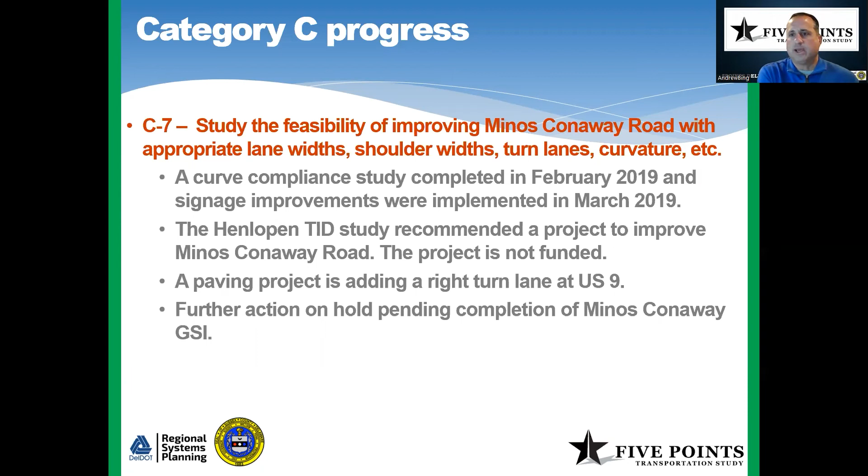Thanks, Andrew. So switching to different modes. Category D relates to alternatives to driving: walking, biking, and transit. And Anne Marie, I see you came up. So would you like to take us away for this one and give us a little update on the status of a hop-on, hop-off service in Lewes?

Sure. So this is something that has been talked about for a long time, and two of our council people have made it a high priority, and it was ultimately prioritized by our city council as something that they want to do in 2022. So we've been doing a lot of legwork. We've been interacting with DTC, and we are looking to lease some of the retired paratransit buses. We are calling it a pilot program because this is uncharted waters for us, so we're trying to move into it in a very mindful way.

So we are looking at a loop that we would run. At this point, we believe we would run 2 buses, and the stops would include the ferry, our beach parking lots, Otis Smith Park, which is near the Beacon Motel, 1812 parking lot, which is downtown, and the Canal Front Park parking lot, which is also downtown. And then we'd go out to the George H.P. Smith Park, which is where the farmers market is on Saturdays. And then down through town and over to Schley Avenue, which is kind of like a satellite parking lot for downtown. So we're hoping we might be able to get more people to park there and use the transit rather than parking all in town.

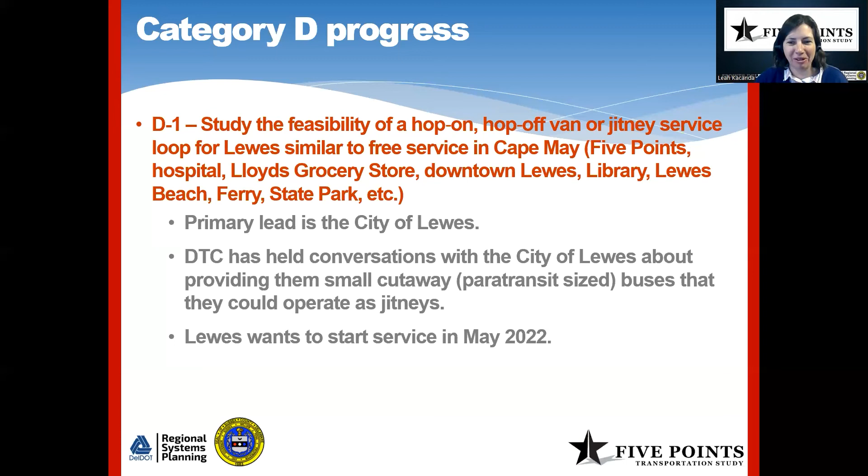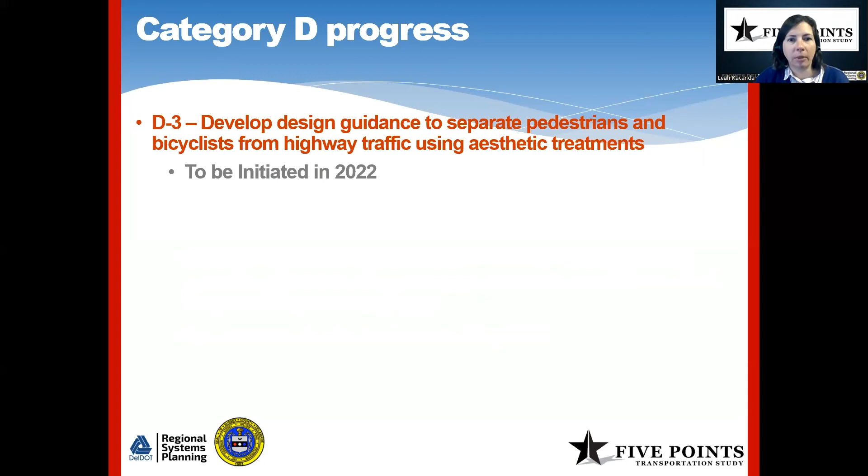Okay. Recommendation D3, develop design guidance to separate pedestrians and bicyclists from highway traffic using aesthetic treatments. So this is another recommendation that will be initiated this year in conjunction with the SR1 low stress bikeway study, which we have talked about before, and which will also address some of the other recommendations coming up momentarily.

Recommendation D4, develop concepts and estimates for filling sidewalk gaps along New Road and Old Orchard Road. So a number of these gaps are going to be addressed by current CTP projects, including Old Orchard Road, the New Road Canary Creek Bridge project, which we discussed a little earlier, Minos Conaway, and New Road between Nassau Road and Old Orchard Road. You can see the dates there on the screen. That's going to be coming through in the upcoming years.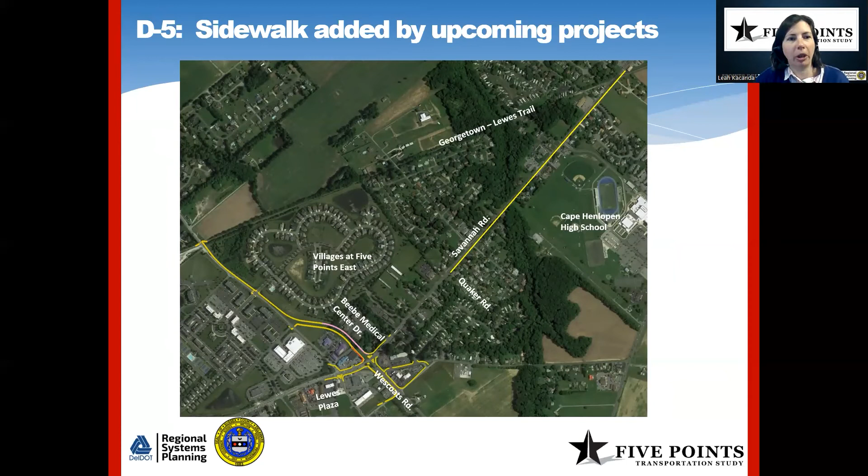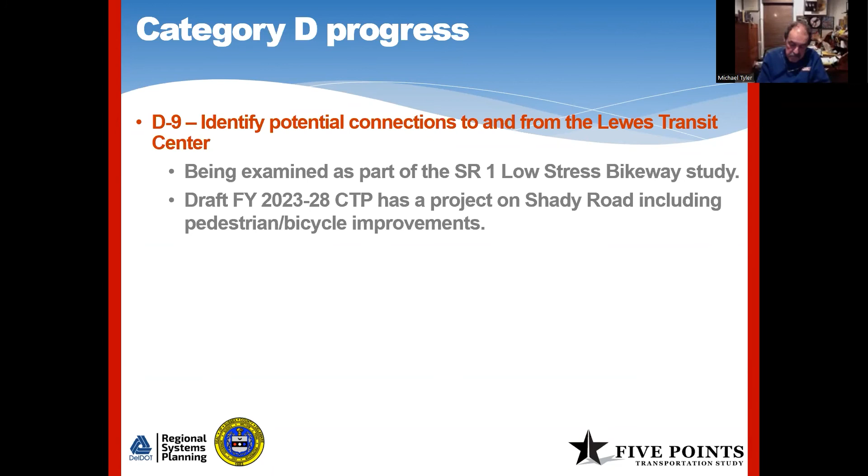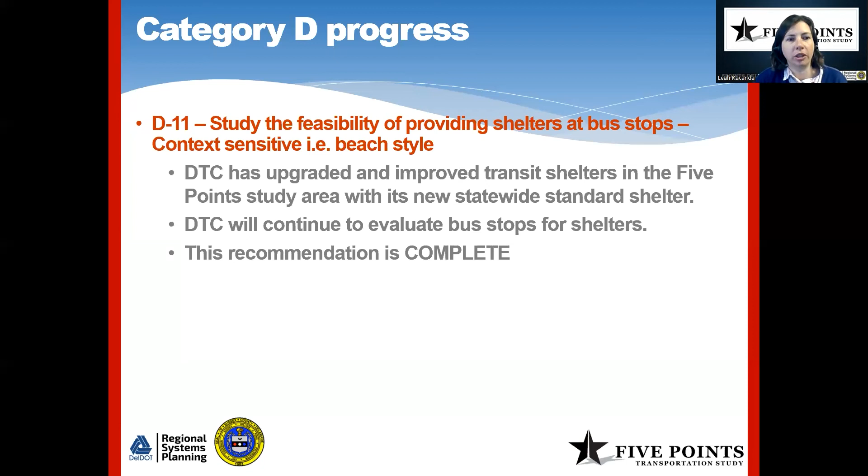Okay, I think we're almost through D here, and then we can get some of your questions. So D11, another feasibility recommendation that we are considering complete, and that is to look at the feasibility of providing shelters at bus stops. As many of you probably have noticed, DTC has upgraded and improved a number of transit shelters in the study area with the new statewide shelter, which has a lot of clear glass. And DTC will continue evaluating bus stops for shelters under their policies for doing so. So we are considering this one complete based on those recent improvements.

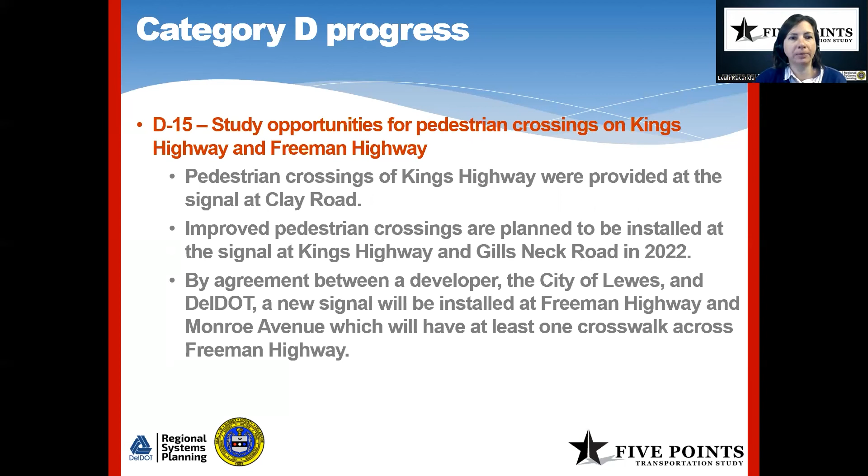Okay, moving a little further south, opportunities for pedestrian crossings on Kings Highway and Freeman Highway. So recently pedestrian crossings have been provided at the signal with Clay Road. And we have some additional improvements coming online in 2022 at Gills Neck Road. Additionally, there's an agreement between a developer, the City of Lewes, and DelDOT for another new signal at Freeman Highway and Monroe Avenue. And that also will have at least one crosswalk across Freeman Highway. I have another slide on this one because there's a lot going on.

May have some additional facilities included with the Kings Highway CTP project. And that will be incorporating some of the recommendations made by the Kings Highway Gills Neck Road Byway Master Plan. I'm sure if anyone has more questions, Mary could speak to those. That CTP project has started and a public meeting is planned for February of this year. So that's coming up very soon. One last thing, and that is RRFBs are now operating at the trail crossing of Freeman Highway near Cape Henlopen Drive. So Mary, I don't know if you want to share anything else with the group on all the great work that the Byway Committee has been up to in the vicinity of Kings Highway.

No, I think you're good. We learned today, actually, there should be a public meeting, as you mentioned, somewhere near the end of February on the design for the CTP project for Kings Highway. So we're all very excited to see what that looks like. And it's been a long time coming. So we're looking forward to it.

Mike, you had your hand raised. Did you want to jump in? Yeah, the one question I had about New Road. 25 years ago, I had no problem riding on New Road. Now I wouldn't ride on New Road because it's so narrow and a lot of cars go really fast. Will there be any opportunities for a bike lane on New Road from the highway or from Nassau all the way to Pilottown Road? That's the one question I have.

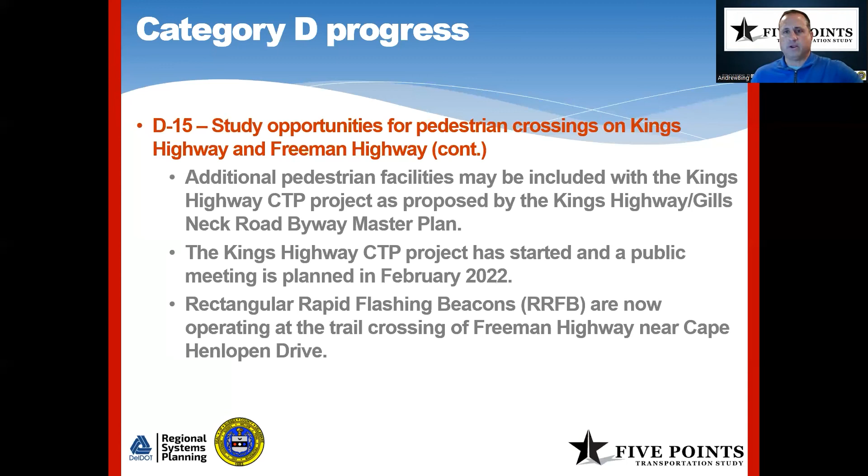Thanks, Andrew. The last category for the evening, very exciting. E2. So again, category E is bigger new transportation infrastructure projects. To that end, E2: evaluate the potential transportation benefits, costs, and impacts of a new road parallel to Plantation Road connecting Mulberry Knoll Road to Route 9. As part of that, require any new development in this area to build this road to state spec, one parcel at a time. This is another project that's a candidate for the FY23 CTP, and hearings were held in September. However, it is still intended that developers would build this road to the greatest extent possible or contribute to its construction via the Henlopen TID.

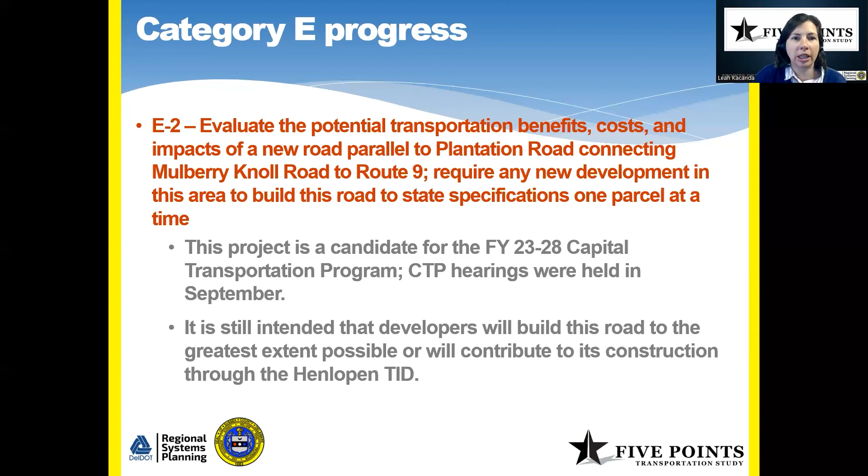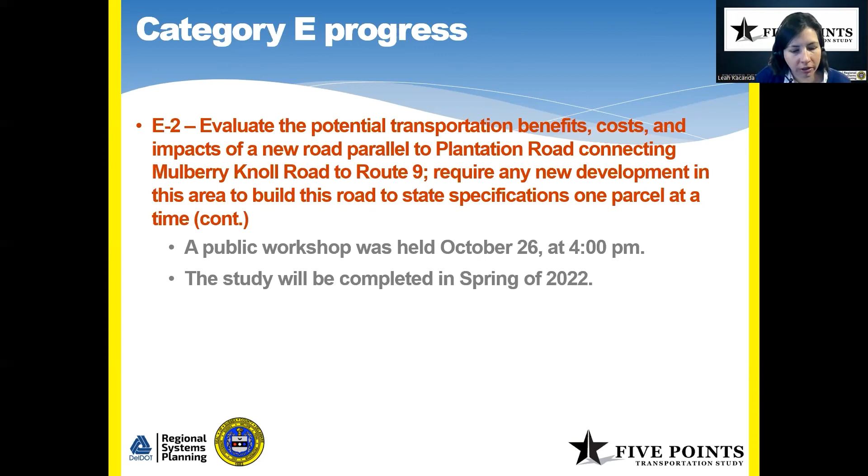And related, a public workshop was held for this in October, and that study will be completed spring of this year. That's for Mulberry Knoll. So more to come on this also.

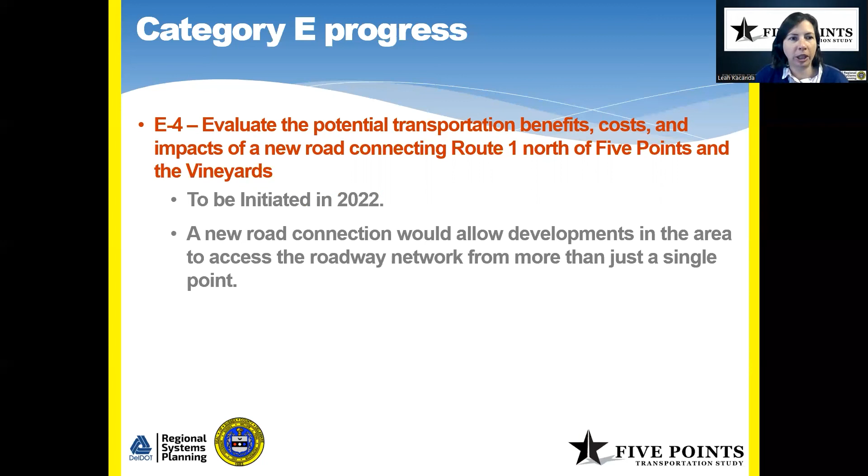Recommendation E4: evaluate the potential transportation benefits, costs, and impacts of a new road connecting Route 1 north of 5 Points and the Vineyards. This is another recommendation that will be initiated this year. That new road connection would allow developments in the area to access the network from more than just one point. So that is a known bottleneck, as all of you know, and we'll be spending a little bit more time on this in the coming year.

And last one for category E: evaluate the potential transportation benefits, costs, and impacts of a new road connecting Postal Lane with the intersection of Old Landing Road and Airport Road.

An Airport Road extension between Old Landing and SR 24 is currently a CTP project, and preliminary engineering for that will begin in 2025. So that is in the pipeline.

That new extension from Old Landing Road will connect to Beebe Drive, which connects to 24. The other part, between Airport Road west of 24 to Postal Lane, does not have a project at this time, although it is recommended by the Henlopen TID study. So that part is not a project at this time.

Okay, all right, great job, Leah. That was very comprehensive and I think was really informative.

Mike, I see your hand up. I wasn't sure if you put it down and then it went back up, or if you have a question, come on. If not, okay, I thought that was an error. Does anyone have any questions or comments about our category yellow, our E category?

Okay, Shante, did you want to come on? Well, I see Bob came on.

Yes, Bob. I blew it when we were talking about category C, which, as I recall, was making the best of the existing infrastructure. Do I have that right? That was category C. Yeah, go ahead.

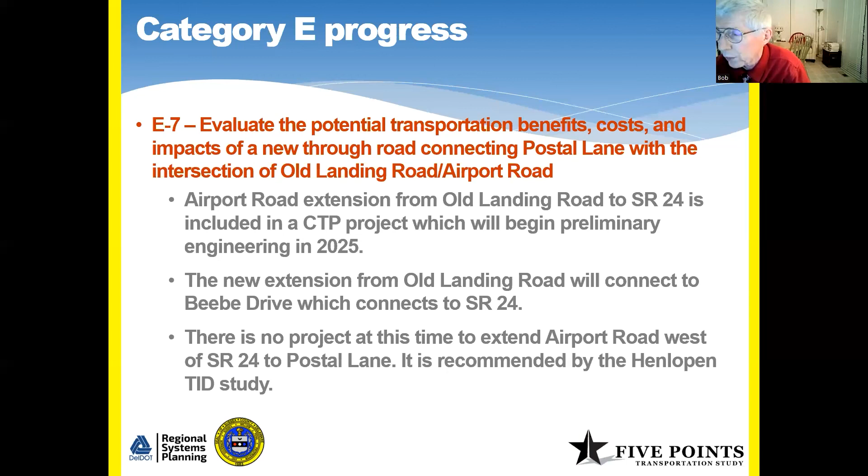That I love so much and nobody else does. But at least we know that DelDOT is making improvements on traffic flow north and south on 1, and we can brag about it. Thanks a lot. Sure, okay, thanks, Bob.

Okay, anything else? I saw Speaker Schwartzkopf come on, but then went off, so I'm going to assume that he didn't want to make any further comments. So I'm going to go to next steps.

As you can see, we're going to continue to work on the recommendations. As we did tonight with the roundabout discussion, we tried to incorporate other points of interest into our working group meetings, but we don't want anyone to think the focus of this group ever stops being the implementation plan, those 78 recommendations, working through each of them and providing updates. A lot of work goes into that. These are not easy efforts to initiate, and they're not easy to complete, but a lot of progress has been made, and we will continue to work on those recommendations.

We'll provide email progress updates in February and March. We will convene the working group again in April, the last Monday of April, April 25th. This is always a busy time from a process standpoint, busy in terms of the work we're doing on the recommendations, but we're going to have the working group meeting at the end of April. We're also going to be preparing our 2021 annual report, covering everything that was done in 2021. We'll report on this in the spring, and then we'll have our annual public workshop sometime in May. So this fits the normal schedule you all should be used to at this point.